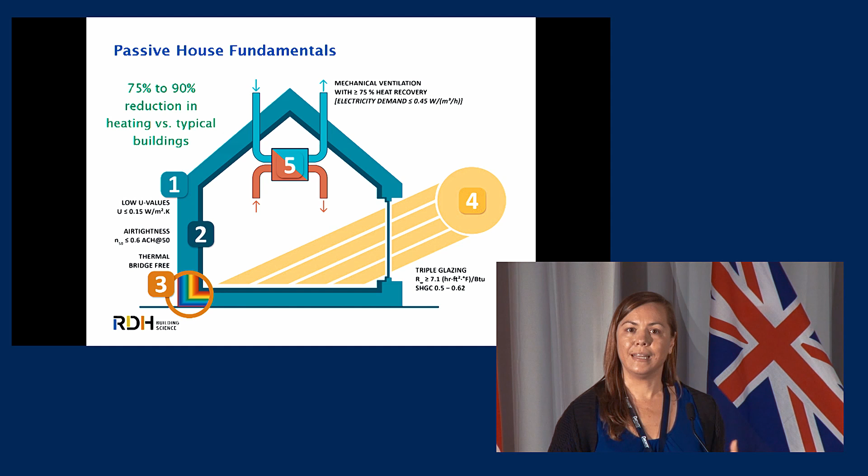And passive house follows a related approach when we talk about getting the loads down initially. And this is an image that talks about the fundamentals of passive house. And I know there's a few other seminars on this at your conference, but really having well-insulated enclosures with low U values, having an airtight enclosure, having a simple design that reduces thermal bridging and heat loss through things like uninsulated concrete balconies and corners and penetrations, optimizing our glazing so that we have solar heat gain from the sun when we want it, and we have shading and ventilation when we don't want it in cooling climates,

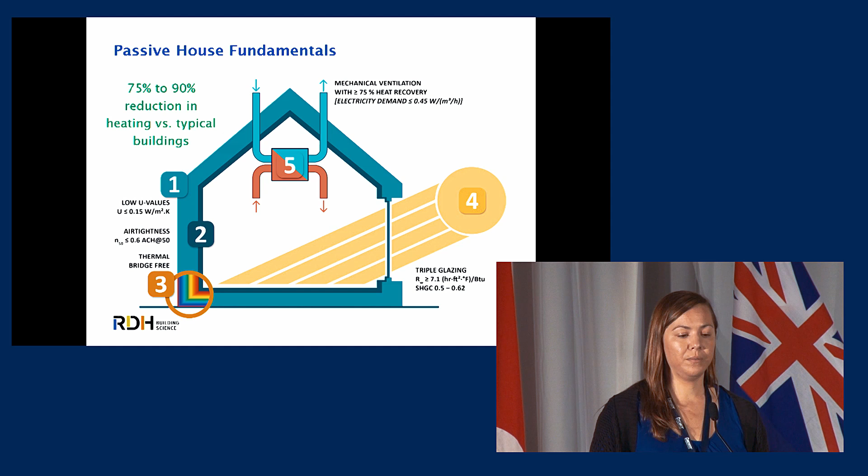and then using mechanical ventilation. And if we follow all of these fundamentals in buildings, we can actually reduce the need for heating by 75 to 90% compared to a typical building. So really, really low energy buildings. And it's been really exciting to see Passive House taking off both in North America and around the world.

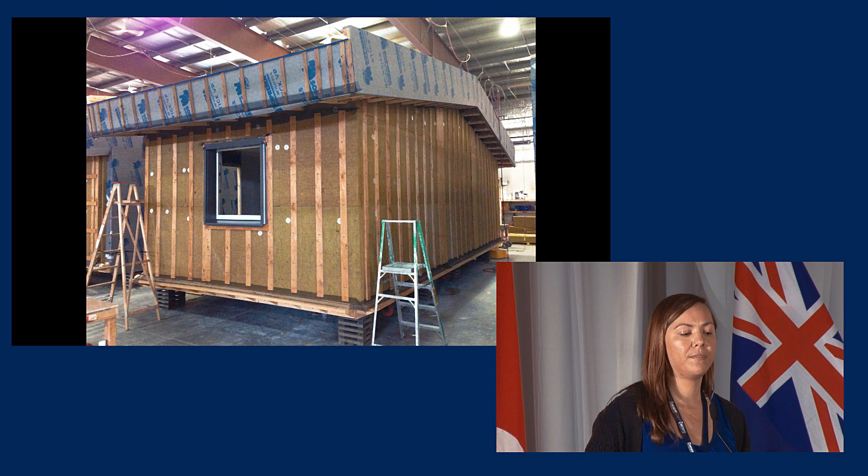And the one in the middle I'm going to show a few more photos of. This is the Bella Bella Passive House. It's a staff housing project in Bella Bella, BC, which is on the coast of British Columbia here. And I like this photo because it really shows you that enclosure first approach, sort of putting insulation all around the enclosure, having a really simple design with very little thermal bridging, airtight details.

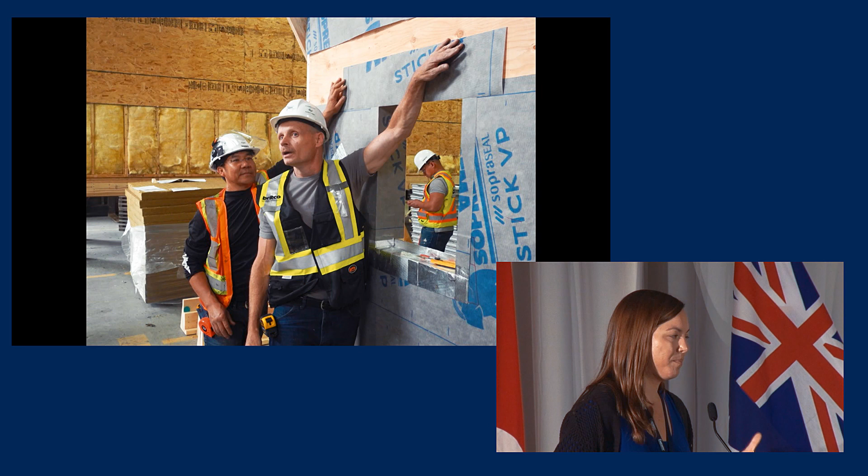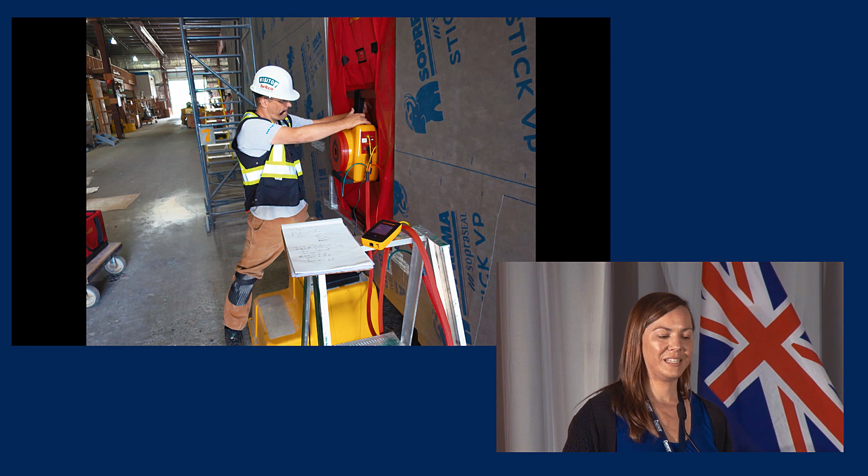This building was done as prefabrication construction, so this is an example of some of our guys in the warehouse showing that detailing to have a really airtight window installation. Doing the airtightness testing before we got to site in this case, making sure it was really well sealed. And this project was actually shipped up to Bella Bella remotely, craned into place.

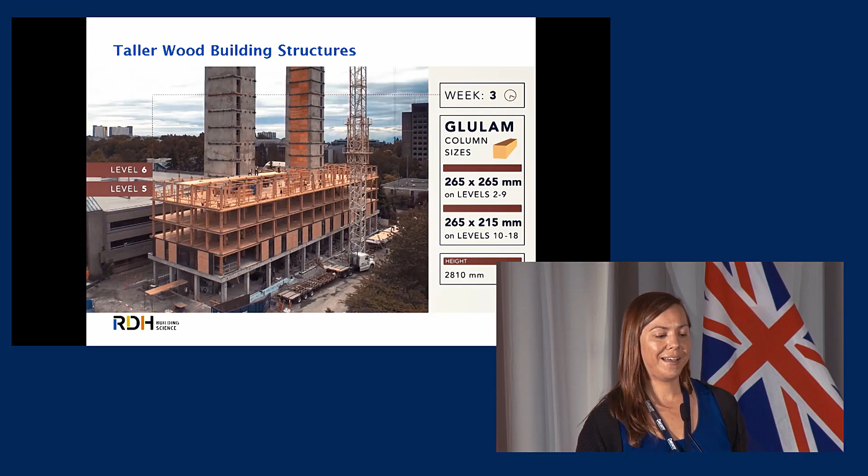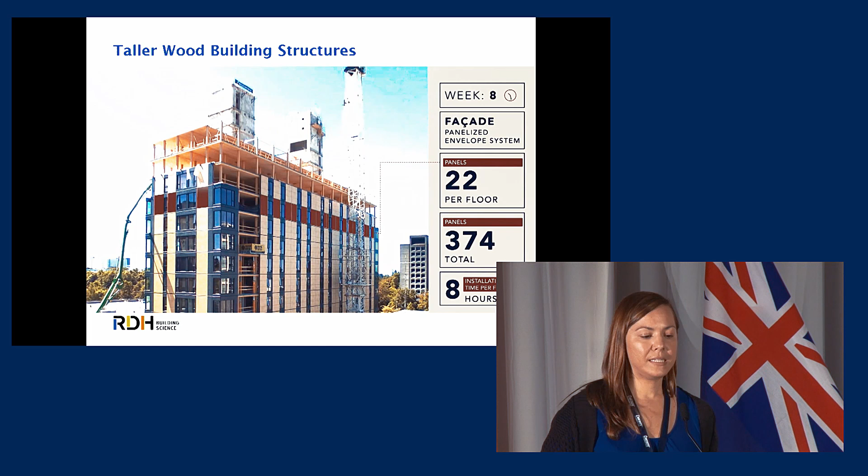This is a little video that you're seeing of a new Tallwood student residence, 18 stories, wood construction out at UBC. And this is really exciting because Tallwood construction, we're going to hear more about this from Peter, can be a way to really cost-effectively implement highly insulated building enclosures, and kind of changes the conversation around what's achievable in terms of low-energy buildings for high-rise construction. So we're starting to see prefabrication and wood used in many more projects to achieve these sustainability goals. And we'll hear more about wood later as well.

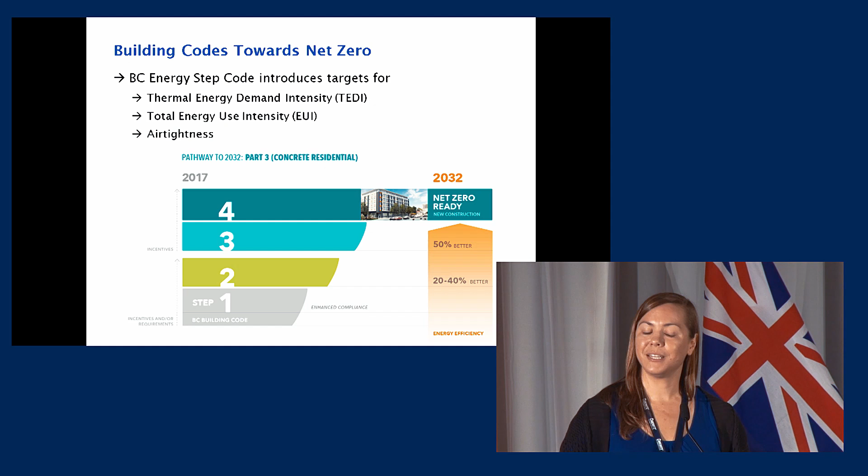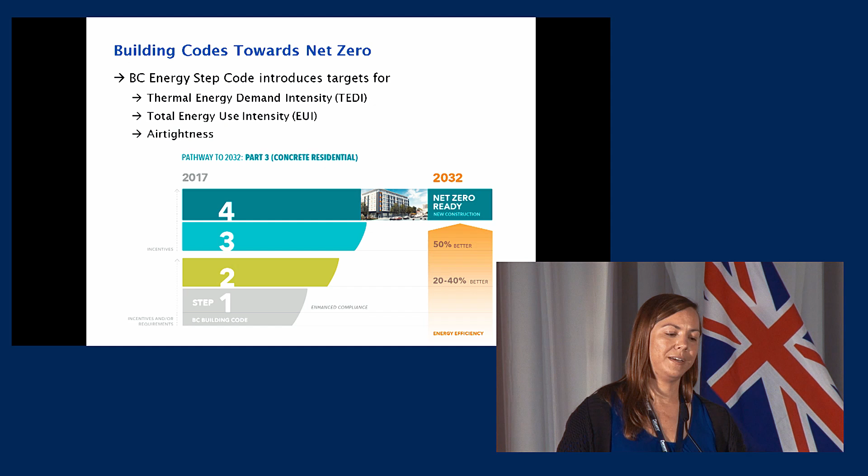So I talked a bit about net zero and about Passive House, and what's also really exciting is that our building codes and our standards are pushing towards these same goals as well. Here in British Columbia, we have a new energy step code that follows a very similar approach to Passive House, where we have what's called a thermal energy demand intensity that requires us to reduce the heating loads. We have a total energy use intensity that limits the total energy consumption of the building, and we also have airtightness requirements. So really following that same step of reducing the loads and then using energy efficiently before we have our future goal of net zero.

And energy modeling is going to be a really big part of this as well. The targets that I showed you in that last slide are all demonstrated through energy modeling. So here locally, many projects are already using modeling as a design tool to cost-effectively optimize buildings and meet these goals. And I think even more projects will be making use of modeling to do that going forward.

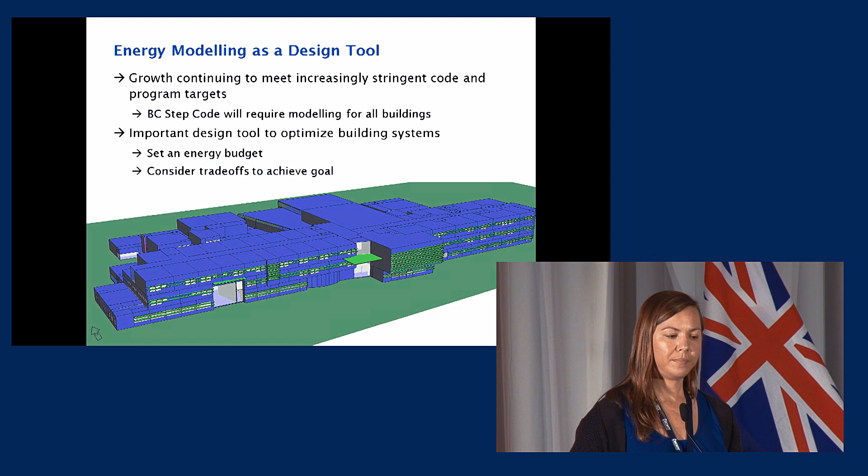And so this is an example of a few different packages of measures. We've done some archetype energy modeling studies where we model a building, we look at all these potential energy upgrades, we look at the costs and the savings associated with that, and we put some packages together to look at what standards and metrics are achievable. And you can see this is just a short example, but the first bundle is a group of energy efficiency measures that are cost effective right now, they're positive net present value. It makes sense that we start doing these now.

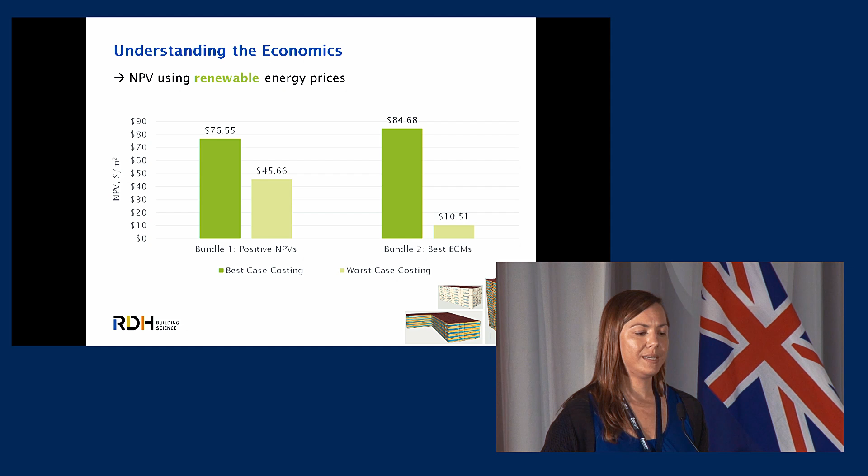And then some of the deeper energy measures are not quite cost effective yet, they still have negative net present value. But when we actually compare them to renewable energy prices in the context of net zero energy and net zero carbon, they become very cost effective. So as the conversation changes around achieving these deeper goals and looking at renewable energy, we can also change the conversation around what makes sense for buildings and look at how we get there cost effectively.

We talk a lot about new buildings and what's happening in that realm, but about 70% of the buildings that will be here in 2030 already exist today, and so it's maybe even more important that we're also looking at retrofitting our existing buildings to achieve deep energy and deep carbon reductions.

And this is really possible, and we've worked on a few different studies looking at that. We find that this work is most cost effective when done at the time of renewals. So if you're already changing your windows or replacing your boiler, already doing work at the building, it becomes quite cost effective to then incorporate energy and GHG reduction measures.

And the other point about it is that it's highly cost effective compared to low carbon energy solutions. So rather than trying to build new power plants that are zero carbon or low carbon, a large solar field or a low carbon district energy system, it's actually more cost effective to retrofit the buildings to be ultra low energy or zero carbon.

And I've shown some examples here of a building in Vancouver that we did recently that was going through a large renewals project anyways, and the owners took it upon themselves to use that as a time to implement deep energy and deep carbon reductions. So they added exterior insulation to the outside of the building, they put in new triple glazed fiberglass frame windows, they reduced air leakage by 55% at the building, and they're now looking at implementing some ventilation measures to put heat recovery ventilation in the suites.

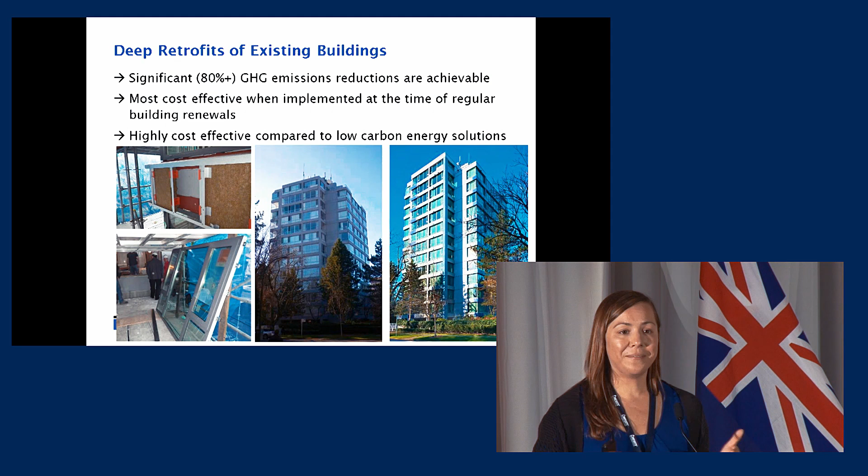And all of this was done very cost effectively at the time that they were already doing renewals, and they were able to reduce energy significantly. They actually saw a 65% reduction in heating energy in the building. So a really great example of using the renewals as an opportunity to also make some big improvements in the existing building. So that's a really quick snapshot of some of the exciting things that are happening in the building industry. Net zero passive house, codes and standards, and existing building retrofits.

We're going to hear a few more different innovations from a few different perspectives here, and then once we've gone through the rest of the panel, we'll circle back and take some questions. So I'll turn it over to Peter. Just waiting for it to show up here.

So I'm going to talk to you about carbon, since Brittany stole some of my wood pictures. But there's good carbon and there's bad carbon. Each of us depends on carbon for air filters we have, fire extinguishers, some women who have large diamond rings. That's all just carbon there, Brittany. But there's also bad carbon. So we're going to try to focus on some of the things around the carbon that we don't want.

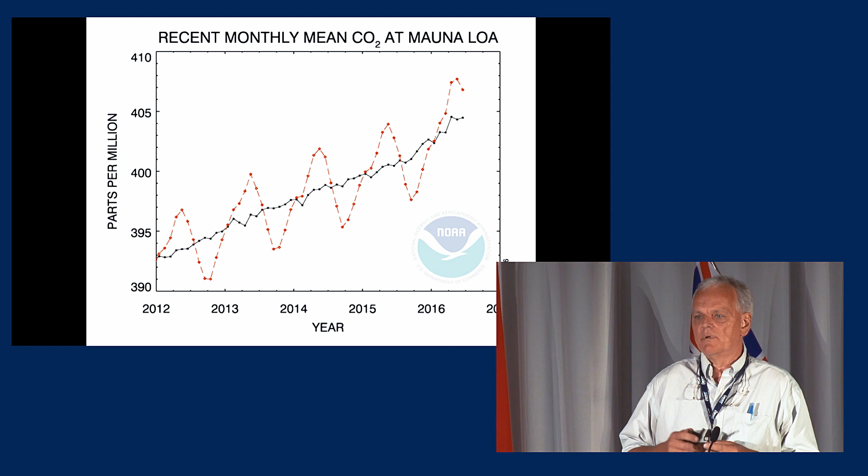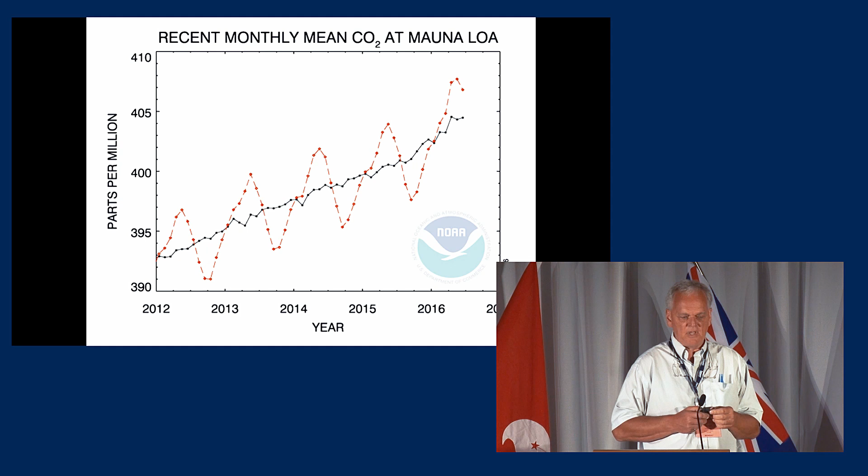This is a picture of a graph showing the ups and downs of the carbon concentration in the atmosphere taken at Mauna Loa in the middle of the Pacific Ocean. I'm going to come back to that, but I want you to remember that and think about why it's doing what it's doing. But first, I'm going to ask, does anybody know who this is?

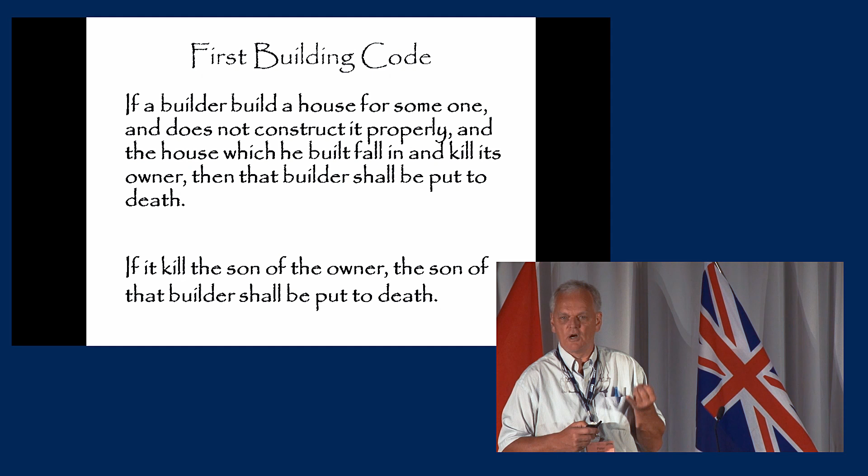How many of you have kids? How many have children? Might want to suggest they stay away from being an architect, engineer, or contractor if that was our building code.

The reason I had that picture there is because the first building code has changed significantly, and these days, there's a lot of emphasis on the decarbonization of the built environment that is being incorporated into our building codes. It's happening from both an operational point of view, but also from an embodied point of view, from the building to building point of view.

As you can see in Europe, there's several countries that require life cycle analysis. They're focusing on energy in the building operations as well as energy in the materials that go into it. And it's really focusing on reducing total carbon. In Canada, the Canada Green Building Council, just a month and a half ago, launched their carbon project to really inspire and enable people to reduce carbon in the building operations and the building itself.

And so has the City of Vancouver. Their policies came into effect on May 1st that requires reporting of embodied impacts. But from a wood perspective, wood does play a role in reducing carbon footprint. And it's really the 3S of sink, sequester, substitute.

It starts with sustainable forestry. Dr. Suzuki mentioned the importance of forests in his presentation today. And I think we in Canada are blessed with having a very large forest land base that is generally very well managed. Forests are important because deforestation accounts for about 20% of our global greenhouse gases. And there's a difference between deforestation and logging.

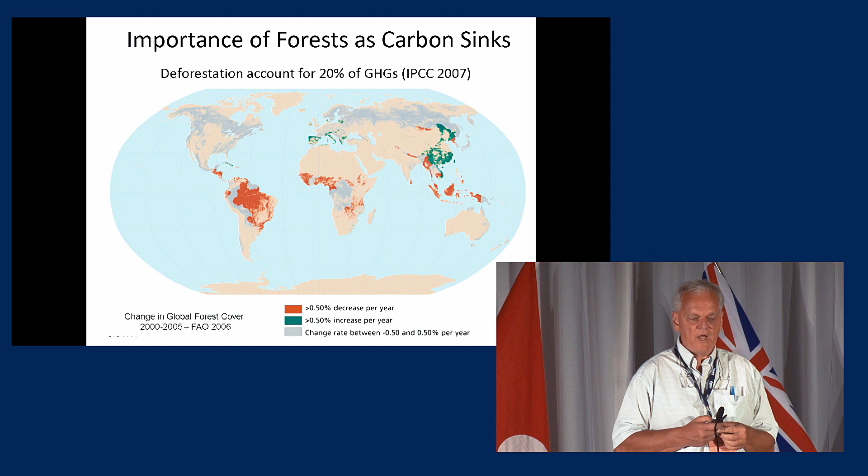Countries in the north, where all that gray is, tend to have a deforestation level that is very, very low. And in Canada, it's about 0.02%, most of that coming from urban expansion. So our forest resource is ever changing, but it's also very stable. Now, I come back to this photo. Can anybody tell me why it might go up and down? Any guesses? Sorry? Summer is where and winter is where?

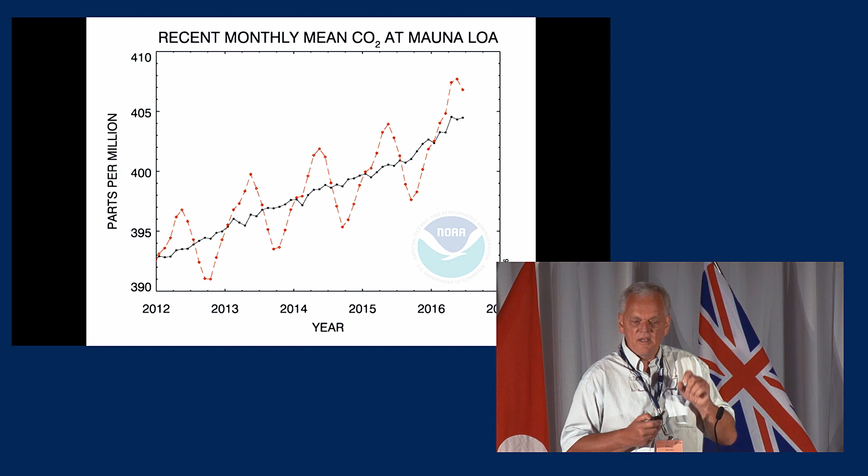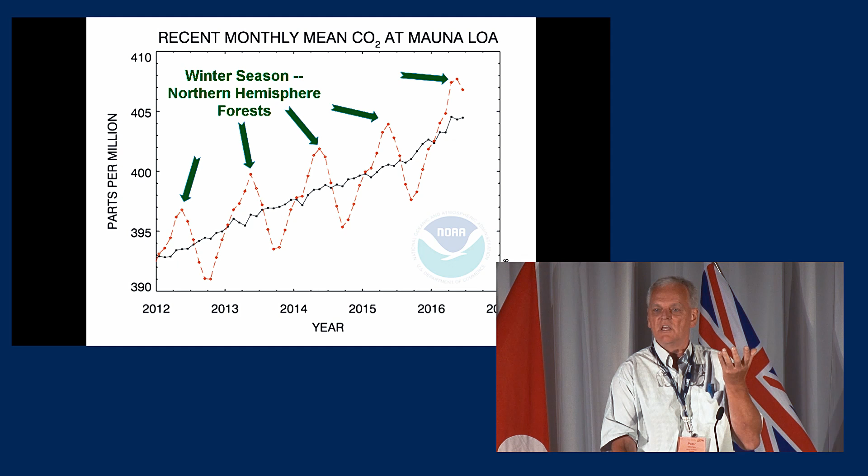That's exactly right. Winter season in the northern hemisphere, where most of the world's forests grow, sees an increase in CO2. Why is that? Because the essential process, photosynthesis, that Dr. Suzuki mentioned, is not occurring as much in the winter as in the summer. And you can see that the difference between forests in winter and summer is a significant increase or decrease in CO2.

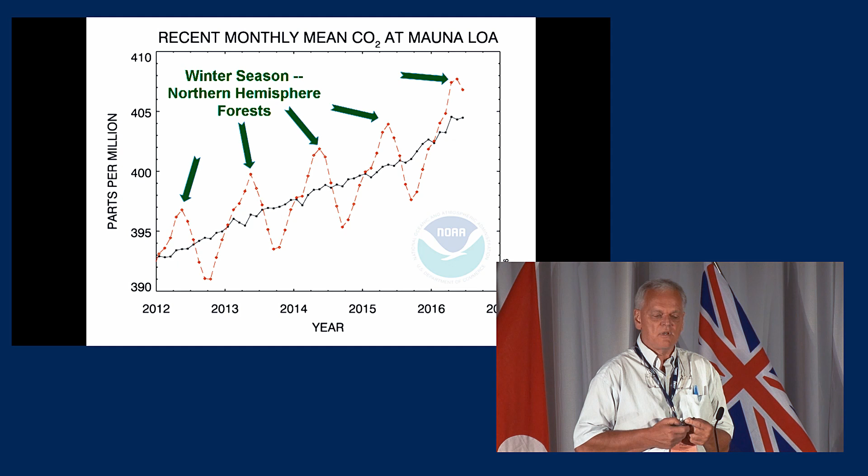A forest tends to stabilize. As forests get older, there are fewer trees, they're bigger, sort of like people. They grow tall and they get big around the middle, and there's fewer of us as we get old. But forests and wood have three ways to reduce carbon. One is locking it up into the forest. But as you can see, over time, the forest tends to stabilize. It can only absorb so much carbon, even though individual trees get much bigger.

But if we use wood and lock that carbon dioxide up into a long-lived product, we're sequestering that CO2 and delaying the re-emission into the atmosphere. But there's another way that we can also reduce the carbon, and that's by substituting for materials that might have a higher CO2 impact. So one of the first pictures I showed was sink, sequester, and substitute. Sink it into the forest, sequester it into our long-lived buildings and furniture, and substitute for materials that have greater emissions.

In fact, when the IPCC came out with their report in 2007, they said that the single biggest mitigation method for climate change, and Ralf will cover this a bit in mitigation, is to grow more forest land, like China is doing, grow more wood and trees on that land, and use more wood from sustainable long-term forests. The single biggest way to mitigate climate change.

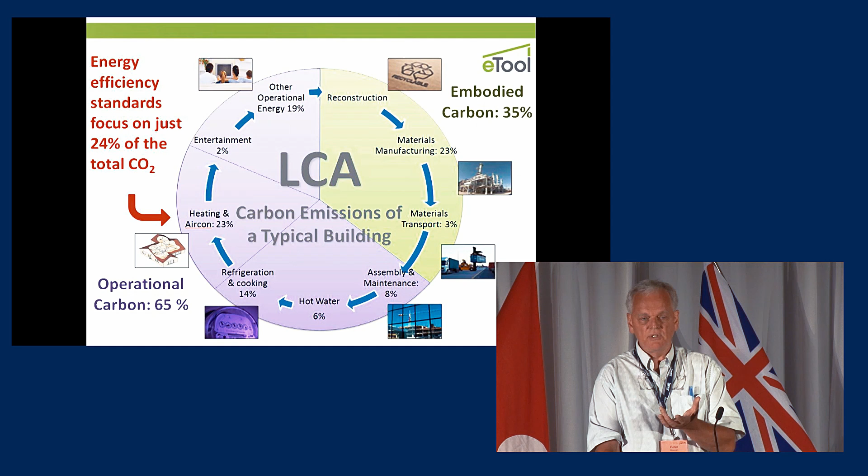Life cycle analysis is a tool that's really essential for determining what is the actual impact of what we're doing and the choices we make. This particular one shows the total embodied carbon of a building in Australia. But what I found interesting about this is that the energy efficiency standards that deal with the energy for heating and cooling account for 24% of the life carbon of that building. The embodied carbon that goes into building and moving the materials accounted for 35%. So embodied impact is important.

There's a life cycle tool being developed in Quebec for the Quebec government that is looking at a system of assemblies. And as quantity surveyors, this may be of interest to you because you can't know every single way to design a building. But when you're being tasked with contributing to reducing the carbon footprint, tools like this may be of use for you in the future. As an example, one of the things they did was compare a steel and concrete deck with a wood frame system that performs the same job, can be built under the same code, and is basically the same area.

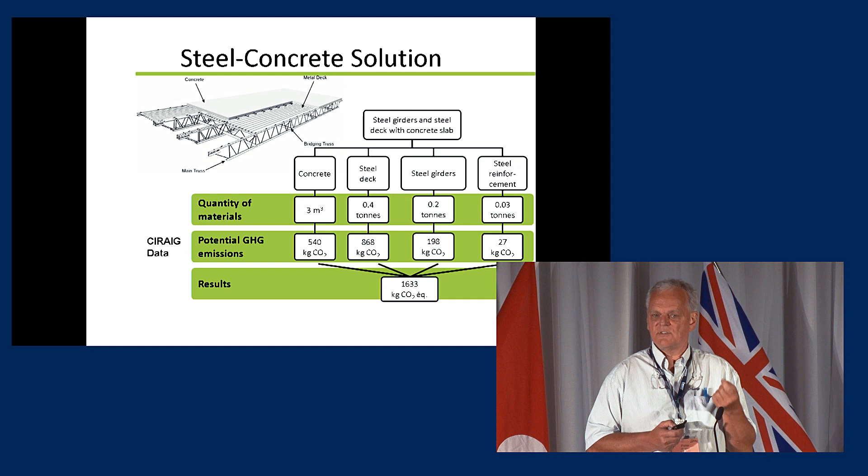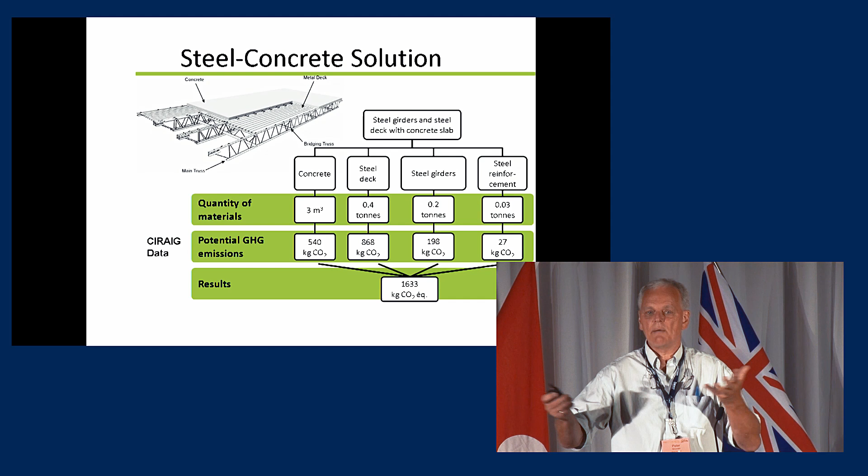So they compared a 6 meter by 6 meter steel and concrete solution, and as you can see, 1,600 kilograms of CO2 was the impact of that particular system. The same floor, doing the same job in the same building and allowed by code, built out of wood for this particular building, was 276. So look at 1633 versus 276. It's not always that much of a difference, but what the tool is designed to do is to help you determine what path you might want to take.

What if someone says, I'm tired of that building, I want to change its look? What if the land value goes up, as it does in Vancouver, and the building is worth more torn down and rebuilt than kept and operated? All of these things can change the relative importance of how the building is made and the operational impact. And that's important.

Research out of Montreal shows that a ton of carbon saved today is equivalent to saving a little more than 4 tons in 80 years. Just like the interest on your retirement plan or a savings plan, you hope that the first dollar you put in is going to be worth more to you when you retire than the last dollar you put in. Carbon has a time interest benefit or impact.

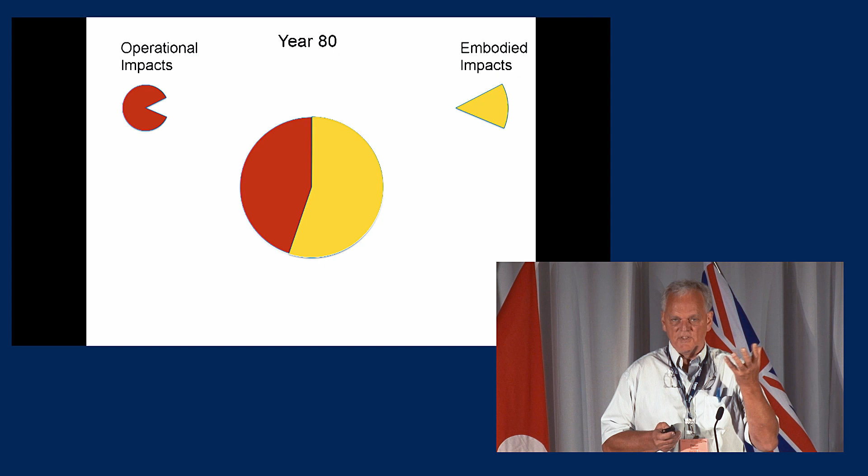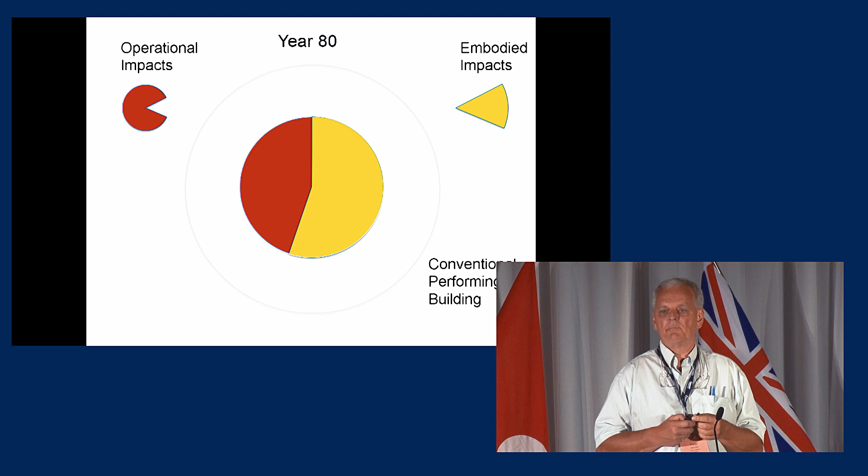There's a slightly higher embodied impact in the building, about 2% greater. And in year 1, your impacts are low. Year 5, year 30, 80. So at the end of 80 years, the heating and cooling operational impact and the electrical use by that building is 46% in this particular passive building. The embodied is 54. That's the energy that would have been used by a conventional performing building. It's about 1/3 the total embodied and operational carbon of building a passive building than building a conventional one.

So what are some of the carbon considerations? I mentioned sink, sequester, substitute, and time. Operations or building performance is also the other one. Think about how you're designing these buildings because operations and embodied are important.

I'm often asked, why should I build with wood? And there was a little old lady who asked me, and she's about the age of my mother, so I had to be polite. She said, I really love wood, but I don't think we should cut down trees to get it. And I can understand that. I live in a forested area, and cutting down trees can be hard.

But I told her, until someone invents a material that is all of these things: it's a carbon sink, it's renewable, reusable, recyclable, organic, cleans the air, cleans the water, provides habitat, provides recreation, avoids CO2, is strong, lightweight, flexible, diverse, easy to use, beautiful, ubiquitous, and cheap, I think I'll stick with wood. And when they do invent that, I would like to know so I can invest in it.

So the question shouldn't be why wood, but if not wood, what? If we're going to continue to build, we have to be aware of what we build it with and how we build it and how that building's going to be used.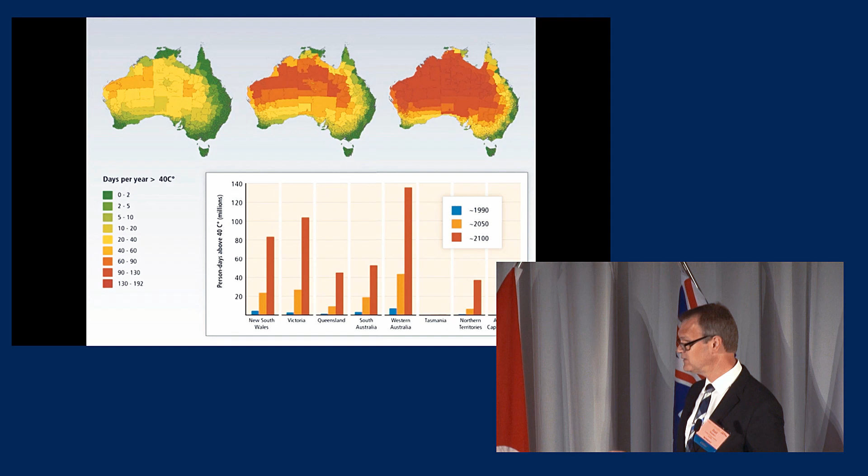I hope all of you are ready for that climate reality, because the climate is going to change, and it's going to change in sometimes extreme ways. This is an illustration of the number of days that are going to be above 40 degrees Celsius in Australia. And I think I have a laser pointer. So this is 1990, this is 2050, and this is 2100. And you can see the substantial difference just in temperature in Australia over the next 83 years, let alone the next 33 years.

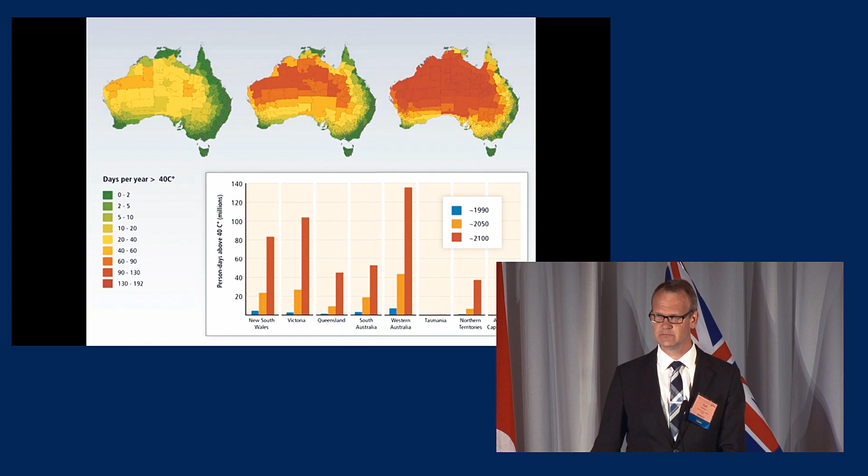So we, as a species, as human beings, as mammals, are going to have to adapt. Now, we are very good at adapting. I like the word adaptation more than I like the word resilience. When I think of resilience, I think of a rubber ball that is going to be impacted by something, and then it's going to bounce back to its original shape. And I don't think we actually have the ability or really the luxury of bouncing back to our original shape.

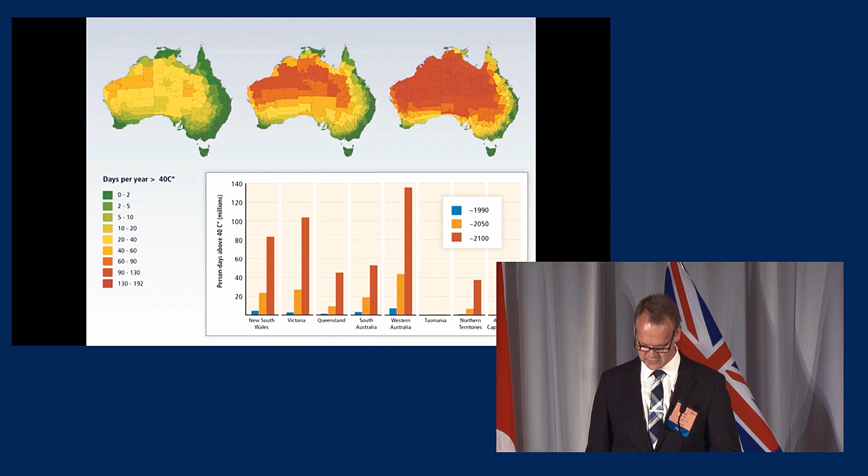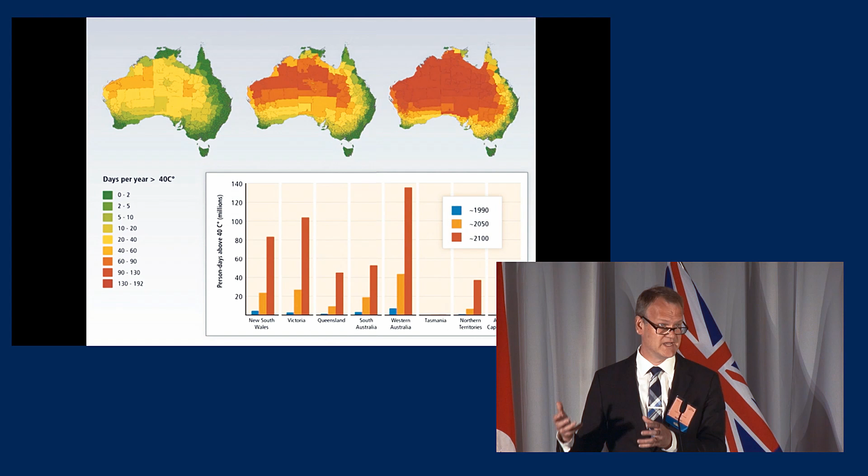Many professionals in our industry talk about resilient communities and resilient cities. Do we really just want to bounce back from a climatic event to more extreme weather events and just bounce back to where we were before? I don't think we have that luxury. I think we actually have to adapt to a new climate reality. So there are probably hundreds of other similar graphs to this for every Pacific Rim, if not global, country in the world, that deal with temperature, humidity, rain, rain on top of snow, freeze-thaw cycles. All the data is already there.

So what is mitigation? Really, mitigation is about responding to climate by reducing its impacts, reducing its severity. Brittany and Peter spoke about all the amazing things that we're doing to reduce our greenhouse gas emissions. We're switching fuels. The Pacific Institute for Climate Solutions has indicated that there's two main ways in which we can get to net zero emissions in British Columbia alone. One is changing our construction materials from concrete and steel to wood. That's one. And the second one is moving from fossil fuels to electricity.

I asked the head of the Institute, how are we going to double our electricity production in the next 50 years to be able to do that? That's a key challenge. We don't know that yet. We don't know how we're going to actually do that. But I believe as human beings, we're actually going to be able to adapt to a new changing reality.

So what is adaptation? Adapt is actually from a French word. So in the 15th century, the English took the French word adapter, and adapter is actually from the Latin adaptare, meaning to fit, and aptus, also meaning to fit or apt. And I think that the situation we are in right now is we have to find our way in which we can fit. As Dr. Suzuki described this morning, we have to understand where we fit in our climate, in our globe, in our natural environment again.

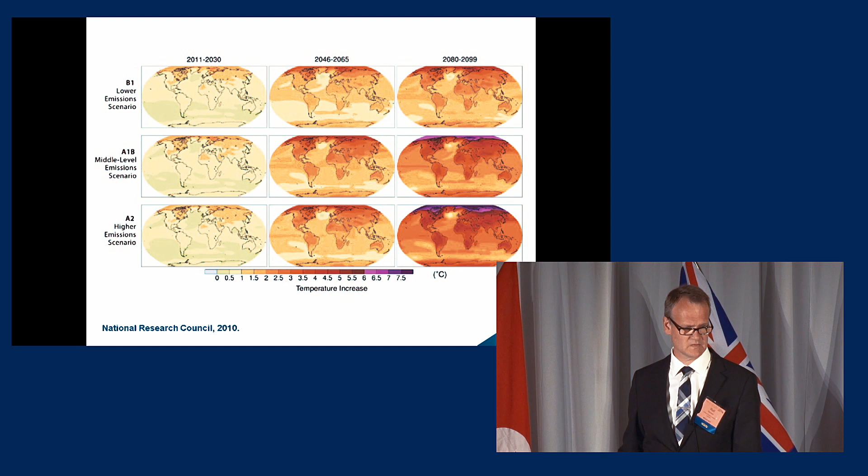The third critical element, I think, is how we actually practice, the knowledge base that we have within our professional disciplines. We all have different roles to play within the development of a piece of infrastructure or building, whether you're a quantity surveyor, an architect, an electrical, mechanical or structural engineer. The different professional associations have different levels of ability and current initiatives to inform their membership and bring up the level of knowledge within the professions.

Level of knowledge is probably the most important thing to do right now, but eventually it's going to come down to duty of care. There's going to be a sense of responsibility that we have to build into our professional code of ethics and conduct. And I believe that we will be held accountable by our clients for designing for the future, just as we spoke this morning about the youth holding the government of the United States accountable for protecting our environment. And we have to understand our legal exposure as a result of that.

And then finally, I think we need to think about different tools. It's not acceptable that we are just going to perpetuate the same way of working into the future. I would hope that we are going to be looking at innovative ways in which we organize the way we work contractually between the professions, getting engaged with all the disciplines as early as possible to help the client set themselves up for success. So I'm speaking about integrated project delivery.

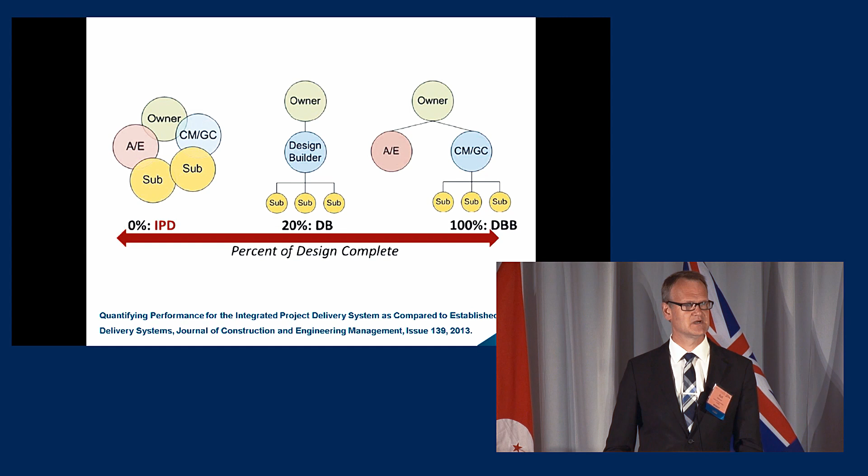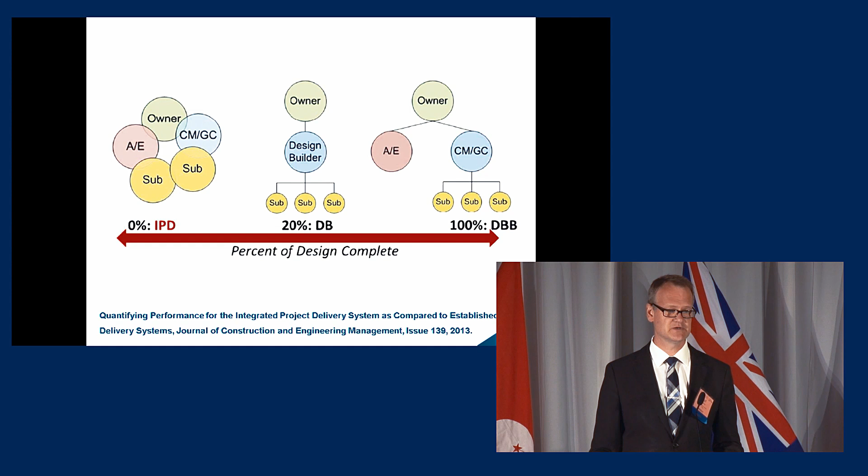We've spoken a lot in the last two decades about integrated design or integrative design, and now we're going to have to move towards a way in which our clients can reward us and we can reward our clients for striving for higher performing pieces of infrastructure that, yes, reduce our emissions, but also adapt for a future climate. That's going to mean innovations in how we contractually work with each other, some shared risk and some shared reward on the table. I think it's also going to change the way in which we see success for a particular project.

So I really am appreciative to be a part of this conference, and it was really inspiring to hear Dr. Suzuki this morning speak about applying our foresight, because really I think climate change adaptation is about applying foresight in what we do.

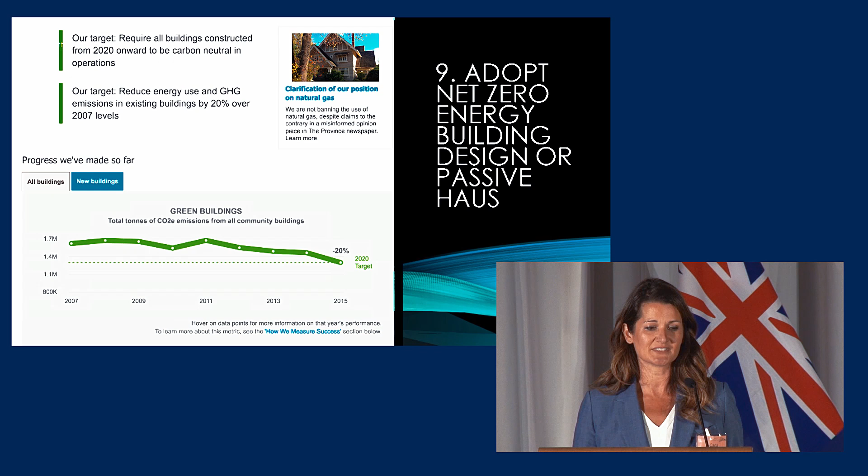As my panelists have spoken about, we also need to look at adopting net zero energy building design or Passive Haus design so that the buildings themselves have zero emission design standards. The last principle that I want to speak about is including systems for district energy to support urban development by generating emissions-free energy in an efficient way that's centrally distributed.

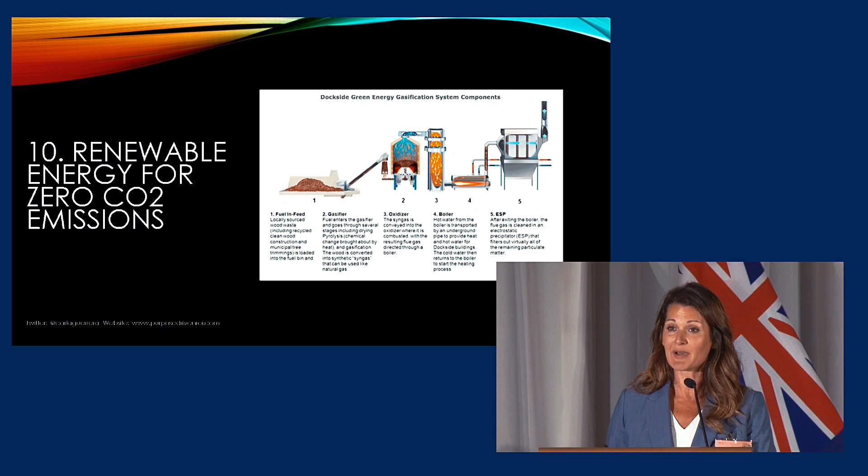This model right here is from Dockside Green, which is a climate positive project in Victoria that uses a district energy system and takes biomass from wood waste that is used to fuel the energy for the neighborhood.

We need to take this integrated approach to the transformation that needs to happen within the context of urban development. This sector absolutely needs to turn this train around and start to create climate positive action in the built environments. So no matter where you work in this integrated model, we all have a role that we can play to transform the needs of our communities and of our development to have a positive impact on the future.

There are a growing number of examples that look at climate positive urban development and transform the way we develop while producing strong returns on investment for the investors. We are not innovating here anymore. These are projects that are demonstrated, they're tried and true, and they are transforming the market.

This is not innovation, it's an imperative. These practices are thousands of years old. It's no longer a luxury of choice for us to transform what's not working and clearly broken in our current development patterns. Addressing climate change is our professional obligation to our industry, and we need to accept it as such. And finally, and most importantly, the imperative is a personal one. It's the obligation we have to our children.

We've seen the science. There's consensus on it. We have the expertise, we have the knowledge, we have the practices, and we have seen the success of the globally recognized projects that are doing this. And it's absolutely our time now for all of us to take this on as an obligation to create the transformation in the urban development context in the cities that we live. It's time to now unleash the potent weapon that we're all holding against climate change and to turn the train around. Thank you.